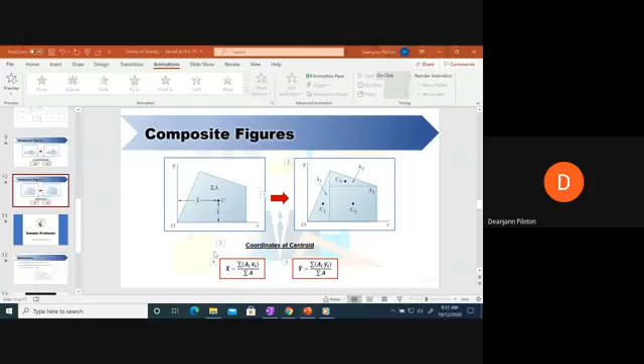Okay, amen. So the topic for today's class is center of gravity and centroid.

If you recall from equilibrium part 1, you can also check in the material under equilibrium part 1, I gave sample problems about these topics to clarify the difference between centroid and center of gravity. Now we will focus on these two concepts, center of gravity and centroid, especially when we deal with composite figures.

So this topic is part of our integral calculus. But what we will deal with here are composite figures that we can break down into regular shapes, for example triangle, rectangle. So we won't deal with irregular shapes here. Then we can apply the derived formulas to get the center of gravity or the centroid of the composite figure.

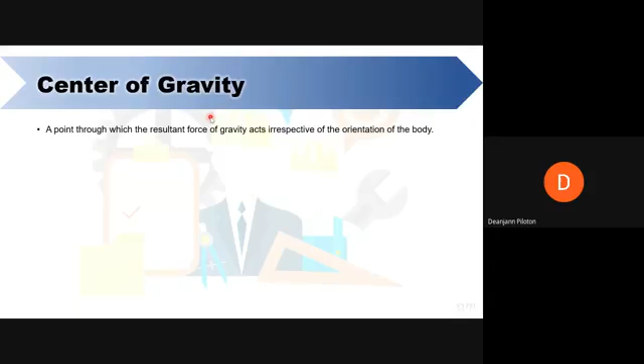Okay, so let's review the definition of center of gravity. It is a point where the resultant force of gravity acts regardless of the orientation of the body. Center of gravity is also defined as a point where the entire weight of the body is assumed to be concentrated. For example, a body is composed of several particles.

Each particle has its own weight. Then for a body, to determine its center of gravity, we need to get the resultant of the weight. So we add all the weights of the particles, then we denote it as, for example, capital W. This capital W will represent the entire weight of the body. And then to get the location, where the weight is acting, we can use Varignon's theorem.

Varignon's theorem, if you remember, we used in class to get the location of a force, especially in a single force system. For example, if you have the resultant of forces, and you want to find where its resultant force is located, you use Varignon's theorem. In Varignon's theorem, each term is force times the moment arm. So here, we will still use Varignon's theorem later on to get the formula for the coordinates of the center of gravity.

This center of gravity can be represented by coordinates x bar and y bar. So that is the definition of center of gravity: where its entire weight or resultant weight acts.

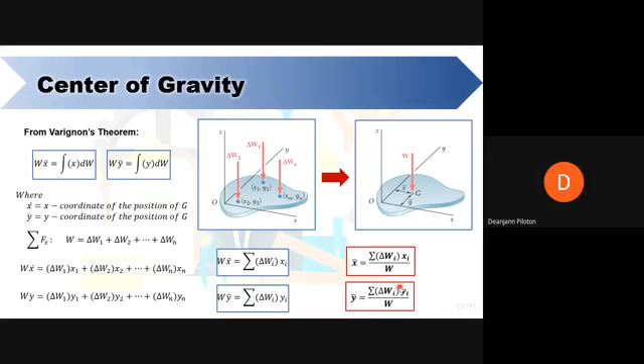Okay, so kung in terms of centroid, gamitan nato ang same figure as an example. Then i-let nato ang T as uniform thickness, so uniform lang iyang thickness all throughout, and then mass density represented by rho, and A as the entire area. So ang entire area sa body is denoted as A.

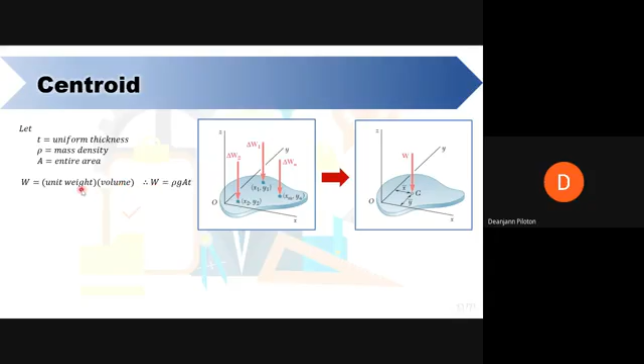So the total weight of the body is equal to the unit weight times volume. So that means that our weight, di ba, ang unit weight is equal to mass density times gravity, acceleration due to gravity. Then ang volume nato is entire area times uniform thickness. So kani atong representation for the total weight na in terms of its area, thickness, tapos mass density.

So pasabot lang ani class for the weight of each particle, pwede po nato sila i-represent in similar manner. Ang difference lang is na lain ng ilang area. For particle 1, A sub 1, particle 2, A sub 2, then for particle n is A sub n.

Okay, so using Varignon's theorem, kaniya ito makreate na equation na ginagamit nato to get the x bar. Buhato lang nato class, instead of dealing with weights, i-replace na to ang weight into this following form na naka in terms of mass density, area, and thickness. Okay, so kani siya. Mauna ni iyang form kung i-replace na to ang mga weight.

Then kung mapansin nato sa kanina equation, common ang density, so pwede na to makancel both sides. And also common po na acceleration due to gravity, so cancel lang po siya. And also ang thickness, so ma-reduce na tong equation nato into this form na area times the location sa particle.

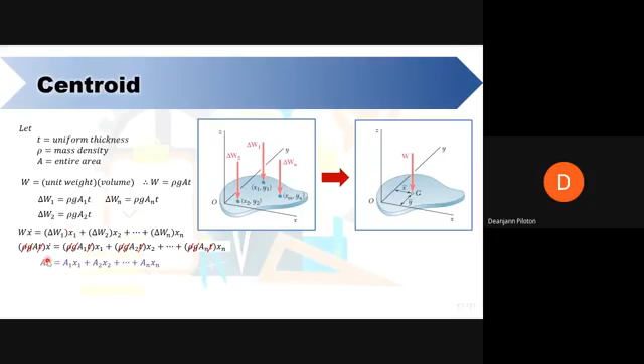So maka-create ta in summary og kanina equation.

So similar manner lang or way para sa pagkuha sa y-bar, i-replace lang nato ang mga weight in terms of kanina form na naka-mass density, area, and uniform thickness. So pwede nato makancel both sides ang mass density, acceleration due to gravity, and also ang thickness so that ma-reduce nato ang form in terms of area and location na y-coordinate. So maka-create ta o in summary na kanina equation.

And if you can recall sa mathematics, kanina equation is the first moment of area. So pwede na to makuha ang x bar of this point G na centroid or center of gravity using this equation. So this time class, nagadili lang ta og area. So summation of area times the location over the total area. Kani siya magamit nimo ni na approach if ang centroid and center of gravity kay nagka-coincide lang.

So naa tay mga formulas na gamiton for common shapes of areas and lines. So for example sa triangle, ang iyang centroid is represented by point C. So pwede po nimo ni gamiton ng mga formulas kung ang center of gravity nimo again nagko-coincide sa centroid.

So kaning point C is from the base represented by y bar. Ang formula daw is h over 3. Tapos area of course 1/2 base times height.

So kaning mga formulas man good class na naka-represent diri dili pasabot na y bar is pa mag-solve ka mao po niyang gamiton nimo na corresponding y bar because magmatter po ng orientation sa problem. Diri kung ingani ang orientation dito sa triangle, kani siya is kaning h over 3 mag-represent na siya as y bar. Pero for example, mag-drawing ta og lahi na orientation sa triangle.

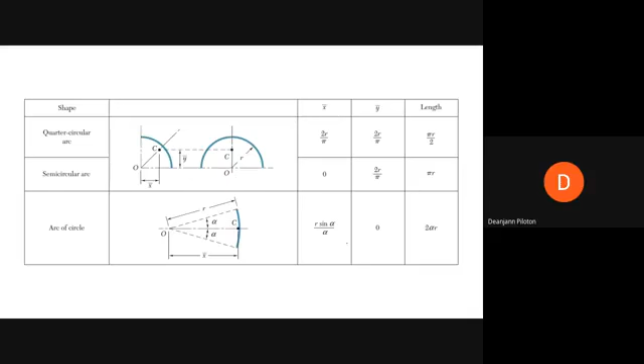Okay, so when it comes to composite figures, katong question ganina about x bar sa triangle. So ang pag-deal nato ato is composite figure. So let's start muna sa in terms of weight, sa center of gravity.

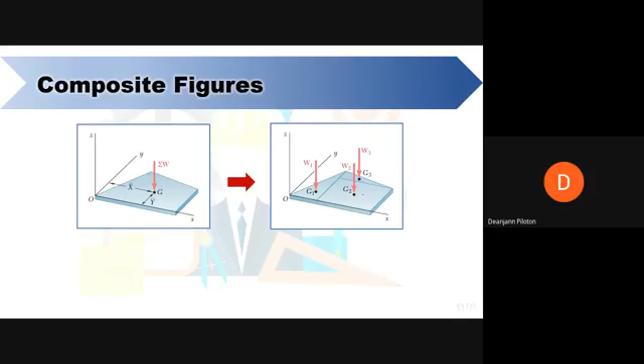Kani siya class, ang buhaton lang nimo, i-divide nimo ang imuhang given body into regular shapes. So mo ni ang itsura. So nakay right triangle, nakay rectangle, then another right triangle. Tapos kada shape is naa siya sarili-sarili niyang weight and center of gravity.

Tapos ang center of gravity karon sa kada shape is i-base na nimo dito sa formulas na na-present. So dito ka magbase para i-locate nimo ilang mga centroid.

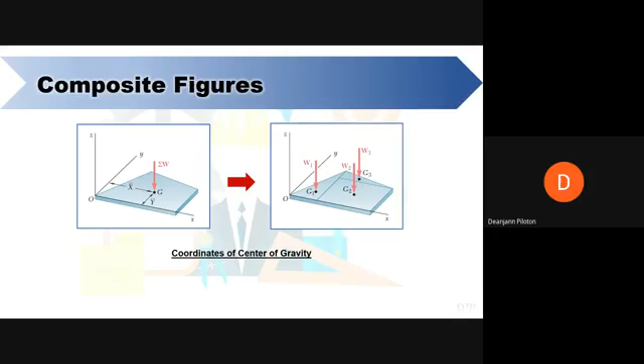So coordinates of center of gravity sa entire body, i-represent natong x coordinate by capital X bar. Kana po ang representation sa figure. Capital X bar is equal to summation of the weight of each shape na imuha or each figure.

Depende sa imong pagka-divide ni siya class. So weight of that figure times its own x coordinates sa iyang center of gravity or x bar niya. Then divided by the total weight of the entire figure.

So same lang po sa y bar, ang ginadil nimo is kada shape isa ka shape. Sa imong numerator, summation of the product sa weight sa isa ka shape times its corresponding y bar. Then over total weight, mo na imong pagkuha sa y bar of the entire figure.

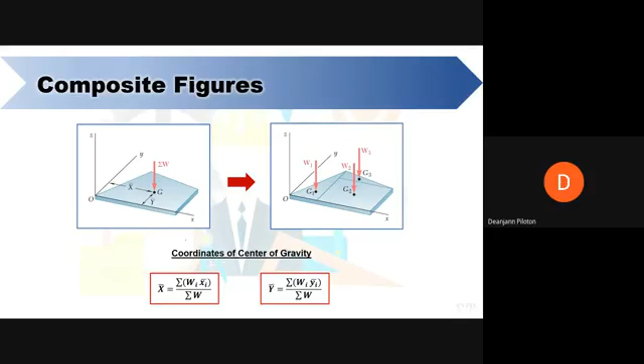The next is for the area. Kung in terms of area ka, same approach lang, i-divide nimo into regular shapes. Kanina ka area 1, area 2, and area 3.

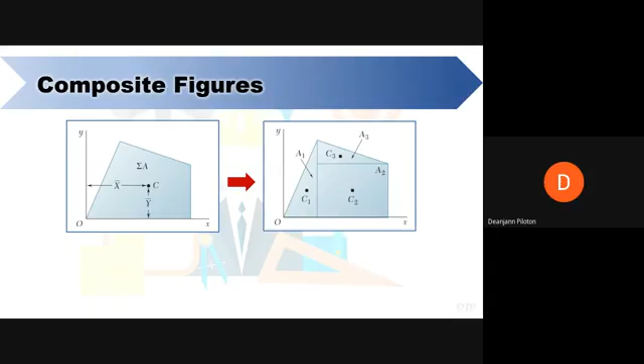So dito ganina sa to ang gibuhat sa triangle, nag-extend ta ato. Baga depende pud na siya sa imuhang diskarte nimo class to get the x bar. So pwede man siya may mubalik mangyapon siya sa original shape niya.

Okay, so kani siya is no need na mag-extend pa ta. Pwede lang na i-divide na nato diretso ang shape. I-divide na nimo mga shape into regular shapes. And then, isolve nimo ang sarili nila na area, kada area sa isa, and also the centroid sa kada isa ka figure.

So, ang coordinates sa imong centroid for the entire figure is capital X bar gapon, but this time, ang ginadil nato is area na. So, sa numerator is summation sa product sa area sa isa ka shape times its X bar. Then, divided by the total area.

Excuse me. So, same lang sa Y bar, naka in terms of area lang.

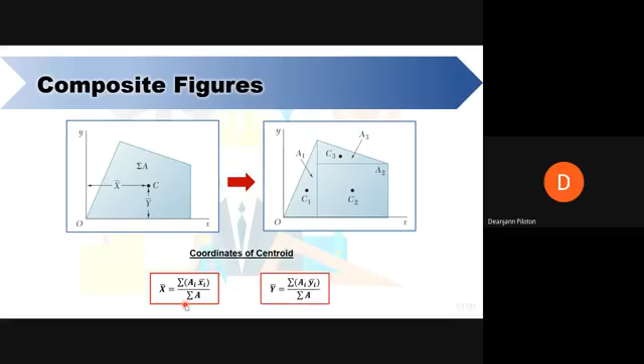Sige, so mag-solve tag sample problems to show the applications of formulas.

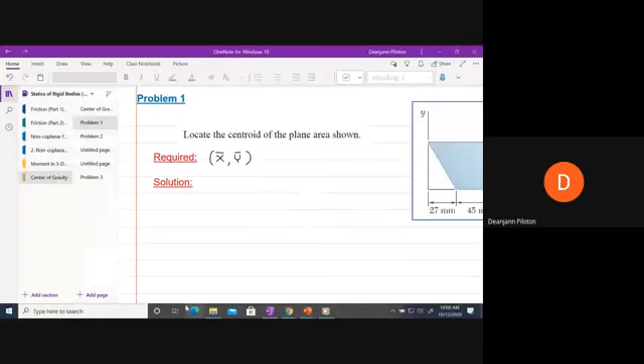So problem 1, locate the centroid of the plane area shown. Isa diri class na problem, ang buhaton nato is pwede nato i-divide into two figures. So pwede ta mag-create og right triangle. Ano siya?

So ang right triangle nato na figure is i-denote nato as figure 1 or shape 1. Tapos kani ato ang square sa pikas is denote nato as figure 2 or shape 2. Then kada isa ani is naa siya sariling centroid.

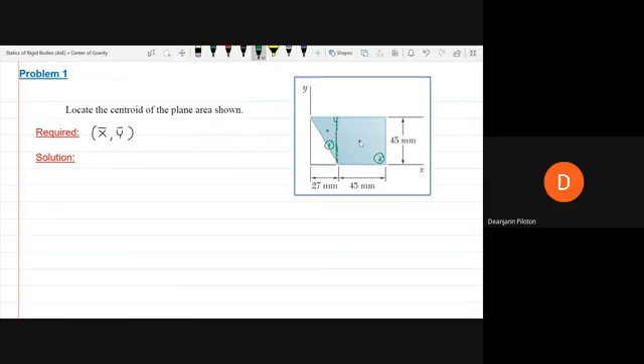So sa kanina problem class nag-locate ta og centroid since naa mga instances na mo coincide lang siya. So ang i-deal nato karon kung centroid is area na lang and ang corresponding na mga centroid coordinates sa kada isa ka shape. So i-take note nato na mao ni ang corresponding formula to get the centroid.

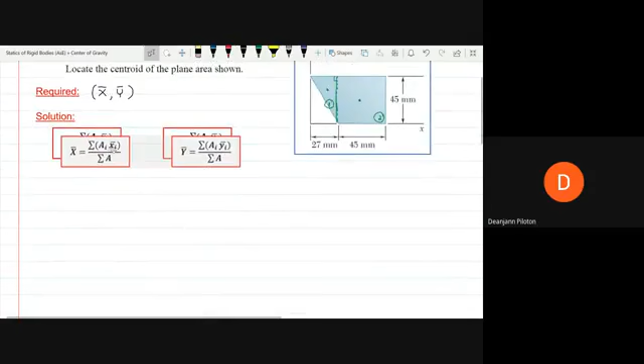So himay-himayon nato class, pwede ta mag-start sa first figure, kaning right triangle.

So, according sa itong pagka-denote class, kaning figure 1 na to, mao na siyang right triangle. So, wala ta nag-deal o anang extension na mag-minus patag area. So, add lang ta ani.

So, kaning area 1 na to is equal siya sa 1/2, 27 mm times 45 mm, 1/2 base times height. So, isulat lang nato as 1/2 times 27 times 45. So, this is equal to, kani siya ay positive 607.5 mm raised to 2. So, sulat na akong positive.

Pwede ninyo ni i-omit class, just to emphasize lang na kani siya na area is magdungag ni siya og area para mabuo ang composite figure. So, dili siya negative yang sign.

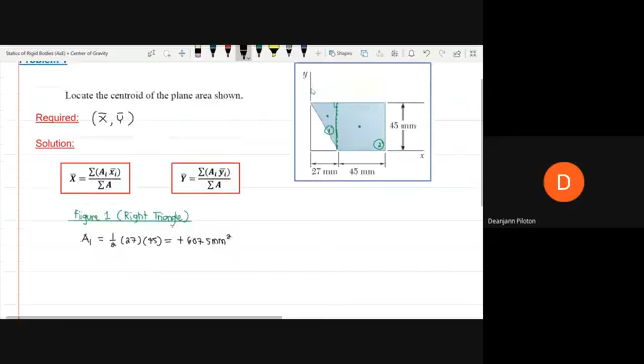Okay? Kung ano siya pa minus, for example, nag-apply ta og kanina shape, ang ato strategy, for example, the entire rectangle na naay kaning side the 45 mm, then ang isa niya ka side is 27 plus 45. So, pwede man natin isolve siya as bigger rectangle minus kaning right triangle. Wala siya na right triangle. Kani bitaw wala, pwede nga na pagtanaw na to sa shape para magkuha tag center later on.

So, ang area aning right triangle is pa-minus. Pero ang pag-deal nato is pa-positive naman. Padungag naman siya og area para mabuo ang composite figure. So, expect na to, syempre, ang figure 2 na to, dapat ang area 2, ang sign niya is positive.

So after area 1, let's solve for x bar 1, small letter. There's x bar 1 for figure 1 and y bar 1.

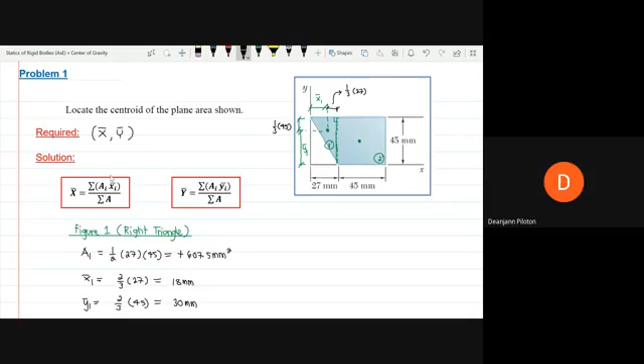Okay so for figure 1, what we need based on the formula is the area of each figure, then x bar of each figure and y bar of each figure, and later the total area. So that's done for figure 1, let's proceed to the next figure.

Okay so the next figure is this square. So its area is 45 times 45. This is equal to, the area is added, right? To complete the composite figure. So this is equal to positive 2025 mm raised to 2. Again, we can omit the positive sign since its sign is positive.

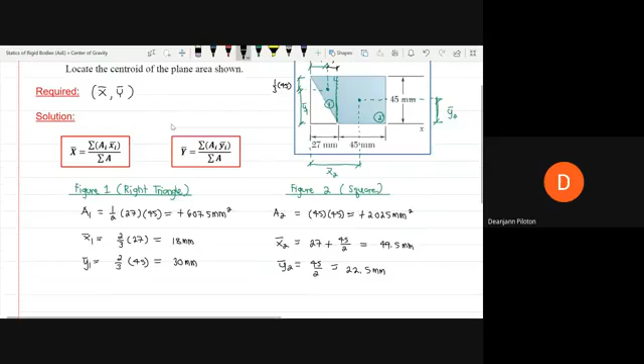So the next thing we do, according to the formula, we need to compute the total area. Okay so total area is equal to area 1 plus area 2. So this is equal to 607.5 positive, plus another positive 2025 area. So this is equal to 2632.5 mm raised to 2.

Okay so let's follow the formula, because our x bar is equal to - in the numerator we can break it down as area 1 times x bar 1 plus area 2 times x bar 2, right? Because it's the summation of the product of area and location of centroid over summation of area.

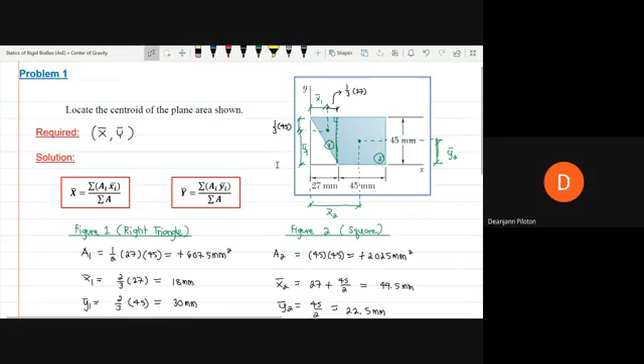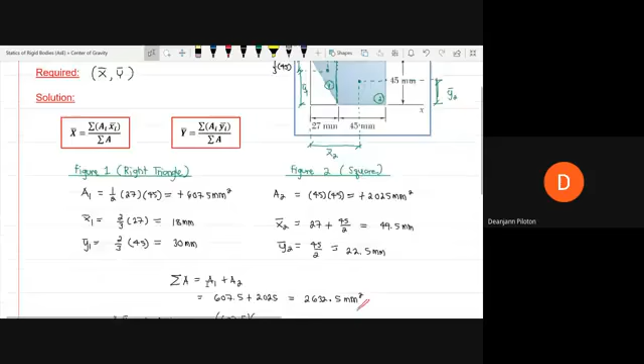Our area 1 is 607.5 positive. And then our x bar 1, according to the coordinate system class, is positive since it's located on the right side of the y-axis. So your coordinate system matters. If the centroid of a shape were located on the left side of the y-axis, it would have a negative x coordinate and positive y coordinate. So the sign of the coordinate matters in your solution. So what you do is carry the signs into the formula when solving. So here it's just the first quadrant for our figure, that's why our x bar and y bar are positive. And also our area is positive.

Okay so our x bar 1 is 18. Then plus area sub 2, 2025, x bar 2 is 49.5.

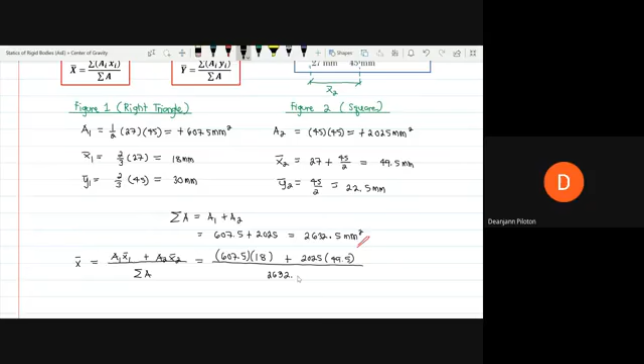Then total area is 2632.5. So ang x bar nato is equal to 42.23 mm.

Questions so far, class? Wala ba? Sir. Okay, sige.

So kana x bar, sunod y bar. So ang y bar nato, pwede nato isulat as area 1 times y bar 1 plus area 2 times y bar 2 over summation of area. So this is equal to 607.5.

So ang y bar 1 nato is positive 30. Plus 2025 times y bar 2 nato, positive 22.5. Then over summation of area, that is 2632.5. So atong y bar is equal to 24.23 mm.

So, ang final answer nato is centroid is located at 42.23 mm and 24.23 mm. So, mao niya itong coordinates. And this is our final answer.

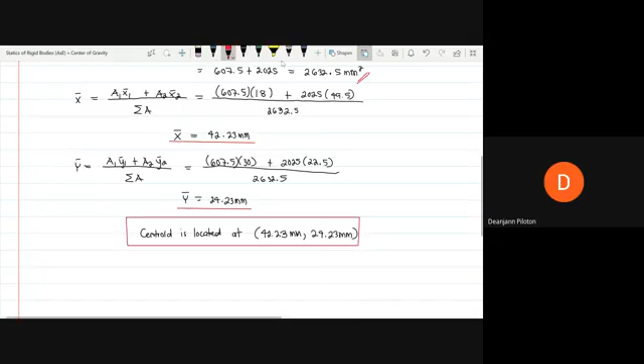So, walay clarification sa number 1. Sige. Wala ata, no? Okay, proceed ta sa problem 2.

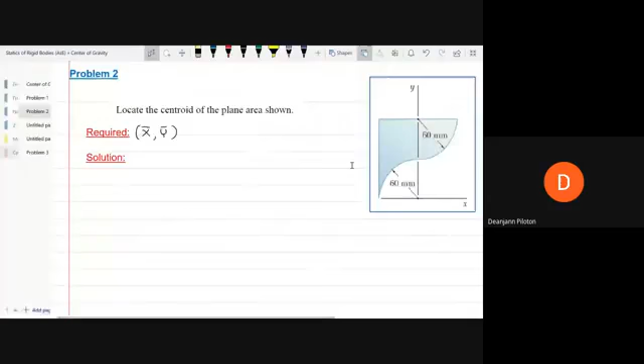Okay, same lang na requirement, locate the centroid of the plane area. Then, kanina po ng figure. And this time na ay pa-minus na figure. So, ang buhatan nato ani is himay-himayan nato ang mga figures.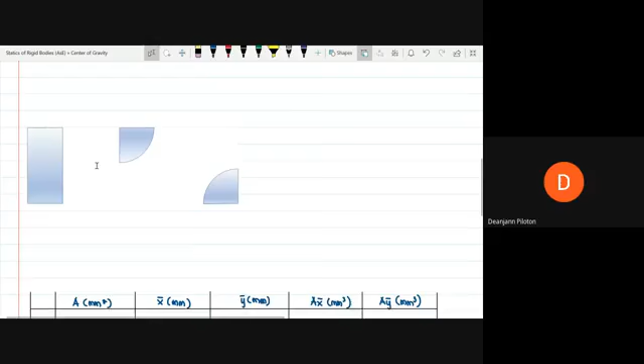So, gamitin nato ni siya. Kanina figure is, kung mapansin niyo class, na pwede mo siya i-break down into a rectangle plus a quarter circle. Then sa baba niya is minus quarter circle. So this means na kaning composite shape is equivalent lang sa rectangle plus quarter circle minus a quarter circle sa ubos. Then equal sa composite na figure.

And then ang kaniya, ang rectangle is pwede na to i-denote as shape 1 or figure 1. Tapos kani is figure 2. Then kani is figure 3.

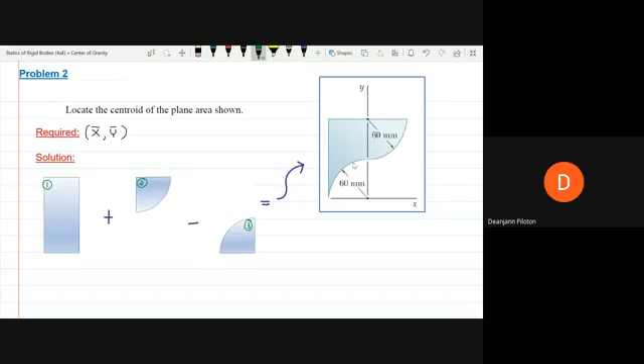Okay, so pwede natin i-solve ni siya class na pareha sa problem 1, na kumbaga isulat na nato diretso ang mga solution. Pwede po natin i-tabulate. So kung daghan na kayo mga shape, pwede kung asa mas convenient para sa imuha, pwede ni may tabulate or pwede largo solution lang na pagka-present sa problem 1. So this time, i-try na to ang isa ka solution na i-tabulate na to mga values.

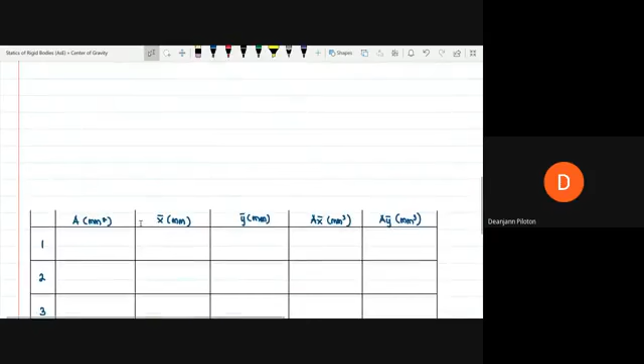So, gamit ta og kanina table. So kung ma-recall niyo ang formula, di ba class, kailangan natong area, x bar and y bar sa kada figure. Tapos later on is kailangan nato ang mga product sa area and x bar sa kada shape. Tapos i-sum up man to siya. Then i-divide by the total area.

Okay, so diri sa tong table, kung masigo lang sa inyong table class kung mag-solve mo, pwede diri po ang solution sa sulod sa table or pwede po i-separate ninyo. Then ang ibutang na lang niyo sa table is kumbaga summary na, especially pag daghan shape, para mas dali ninyo siya matrace ang mga values. Okay, so

mao ni siya ang kaning 1, 2, 3 sa left side, mao ni ang representation sa figure. So figure 1, figure 2, figure 3. So start ta sa area.

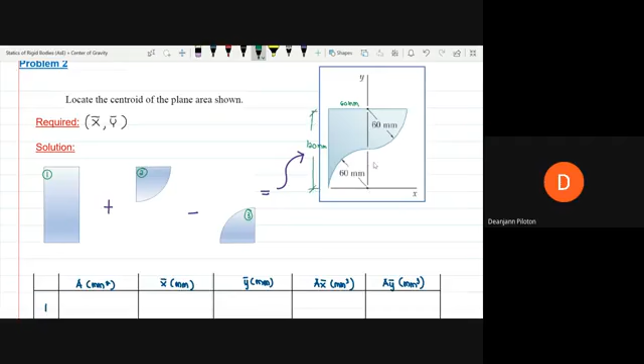Sa figure 1, ang area diya class is according sa given, di ba? 60, this is 60 mm, because ang radius sa kaning arc, quarter circle, is 60 mm. Then kanina length is equal siya sa 120 mm, because that is 60 plus 60, duha ka radius. So ang area nato sa atong figure 1 is positive 60 times 120, so equal ni siya sa positive 7,200.

Maklaro pang sulat class sa table. Hello? Yes. Okay.

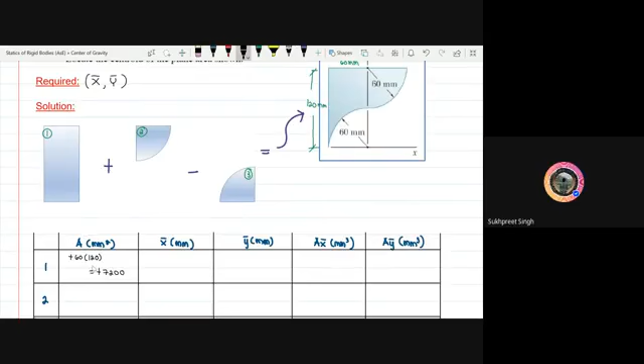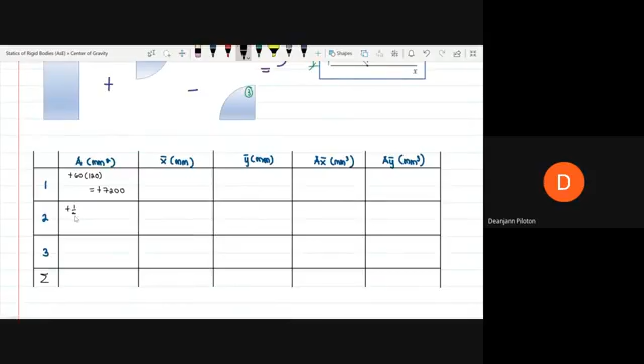Sige, so next is figure 2. Natay quarter circle. Then, kanina area is positive, padungag siya sa composite figure. So, kung quarter circle, pwede siya 1/4 of the area of the circle. So, positive 1/4 of pi r squared. Pi times, ang radius nato is 60, then raised to 2. So this is equal to positive 900 pi.

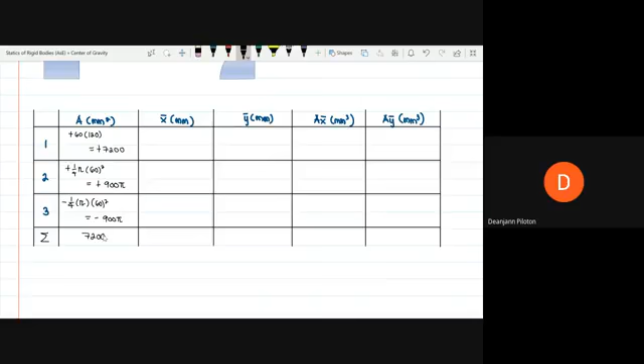Then lastly, nata area na quarter circle po. So 1/4 yapon sa area sa circle. Then ang sign nato class is negative since pa-minus man siya. So equal lang siya sa negative 900 pi. Okay, so kung i-total nato ang area, this is equal to 7,200 since mag-cancel out ang maning 900 pi.

Then next, proceed ta sa x-bar sa kada shape. So start ta sa shape 1. Siyempre, ang centroid class is diri, ano yung x-bar 1. Then kani is murag naog di dapat.

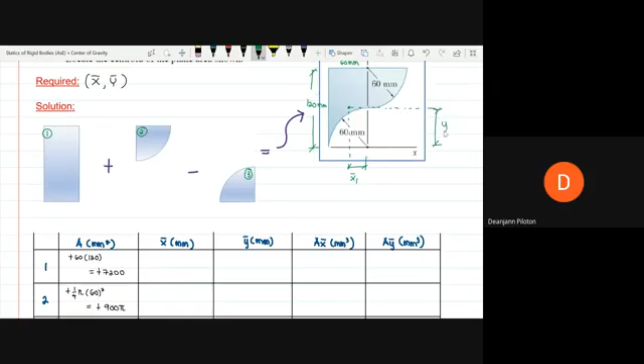So kana atong y-bar 2. Based sa gihatag na axis, nagitagaan man ta, so dili na ta mag-set. Kani x-bar 1 nato dapat negative ang iyang sign, kaya nasa second quadrant man. So negative 60 over 2, this is equal to negative 30. Then sa y-bar, divide 2 lang yapon, pero this time positive. So positive 120 over 2, this is equal to positive 60.

Okay, next sa shape 2 or figure 2, kini siya na quarter circle. Naadiri adapit iyang centroid. Kung mag-focus sa gi-separate nato na figure, kana na centroid, gikan sa isa ka straight edge niya, ang location is 4r over 3 pi. And also from the other straight edge, 4r over 3 pi gapon. Same lang diri sa isa ka quarter circle, same lang nilang radius, so mag-equal lang. And sa sign sila mag-vary. So this means na x bar aning shape 2 nato according sa coordinate system nato, positive ni siya, positive 4r over 3 pi.

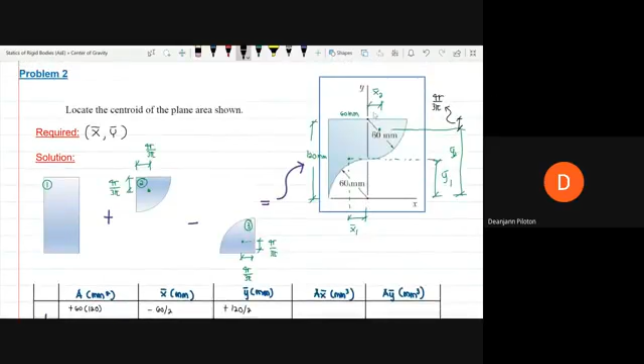Then next, ang iyang y-bar. Kung tanawan na to class, kanina distance sa taas, kana siya is 4r over 3 pi, di ba? So ang y-bar 2 nato is equal to 120 minus 4r over 3 pi. Ang sign nato is positive, naa man siya sa taas, diri sa y-axis, no? So positive atong sign, positive 120 minus 4r over 3 pi. So this is equal to positive 94.54.

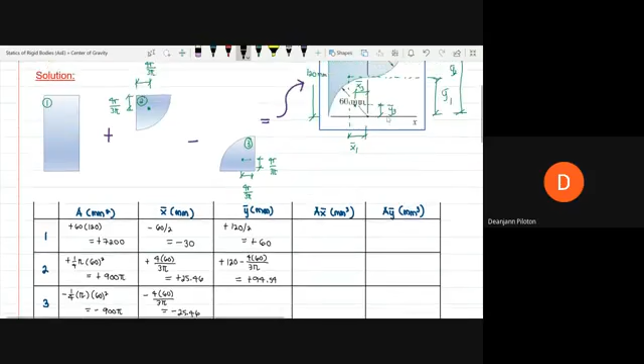Then lastly is figure 3. So let's say naadapit diri ang centroid. Okay, so kaniya atong x bar 3, then kaniya atong y bar 3. So x bar 3 nato based sa coordinate system, negative siya. So negative 4(60) over 3 pi, so negative 25.46. And then ang iyahang y bar is positive lang, so positive 4 times 60 over 3 pi.

So no need to sum up the x bar and y bar. Ang kailangan nato i-sum up after the area is kaning area times x bar and area times y bar. So ang next buhatan ani class is ang area i-multiply nimo by its corresponding x bar and also corresponding y bar. So sa figure 1, its area multiplied by the x bar, take note na negative na sign, pasabot lang ani negative ang atong x bar. So negative 216000. The next area na 7,200 multiplied by positive 60, so we have 432000.

Sige class, kamo daw 900 pi times 25.46. Okay, anyone? 71986.45, sir. Naka-form na naka-pi. Yes, sir. 22914 pi. Okay, 22914 pi, positive, no? Ang sign, di ba? The next, 900 pi times 94.54. 85086 pi, sir.

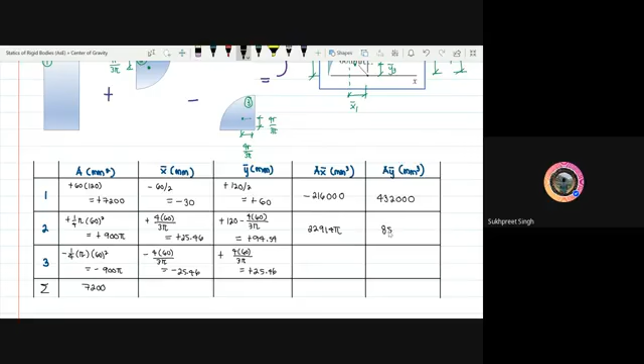Okay, the next is figure 3. So negative 900 pi times negative 25.46, dapat positive siya, no? Kaning 22914, same lang siya aning isa. The next is negative 900 pi times positive 25.46, so this is negative 22914 pi. Sige, paki-sum up class sa area x bar and sa area y bar, kaning duha ka column.

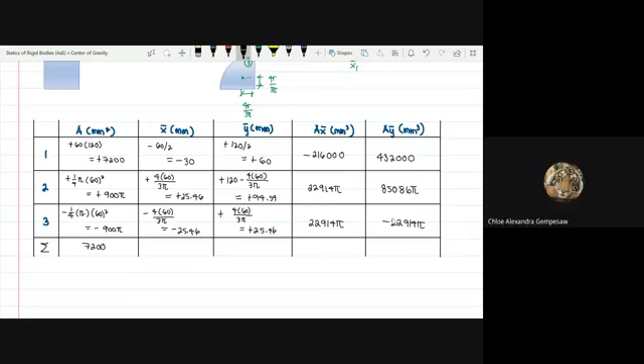Ang uban, gising pang uban. Yes, sir. Okay, sige. Negative 72027.09, sir. Okay, so negative 72027.09. Then sa area y bar, 627319. Then ang decimal is 0.10. Tama ba? Okay, yes sir, 0.10.

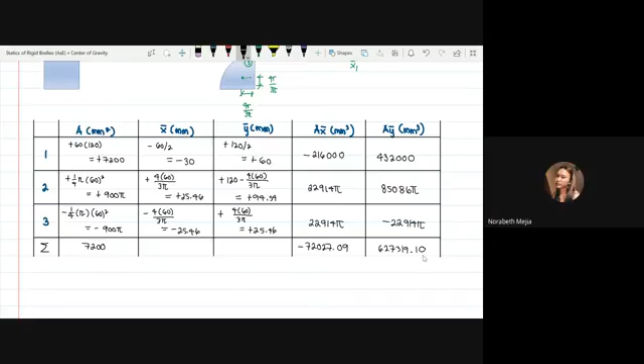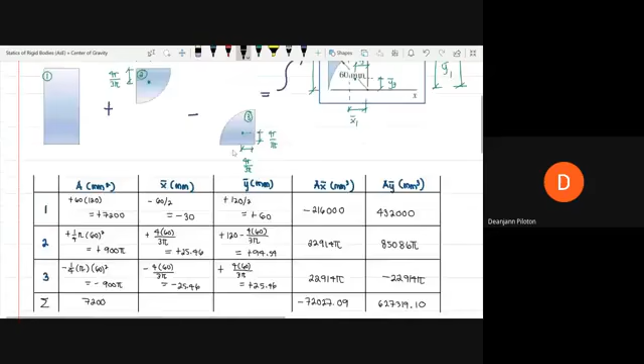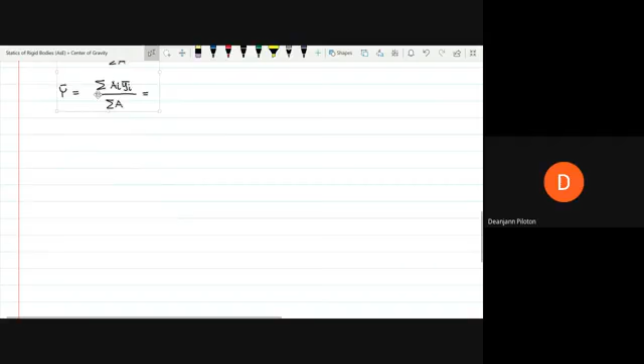Apo, sir. Okay, so mao ni siya class ang nakatabulate na form. So pwede nga ni inyo ang solution, samot na kung daghan og shapes, pwede lang nga ni. Okay, take note lang class sa ang area, dapat mag-matter ang mga signs ani, kung negative ba ang area, pa-minus ba siya. Then sa x bar and y bar, itanawon yun ninyo ang location, especially kung tagaan mo og axis para mabutang po ninyo ang tama na sign. Okay, so according sa formula, mao man ni atong formula for x bar and y bar. So diretso lang nato plug in sa kaning formula ang mga result.

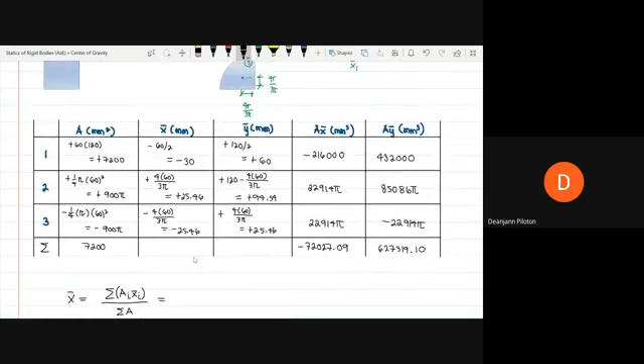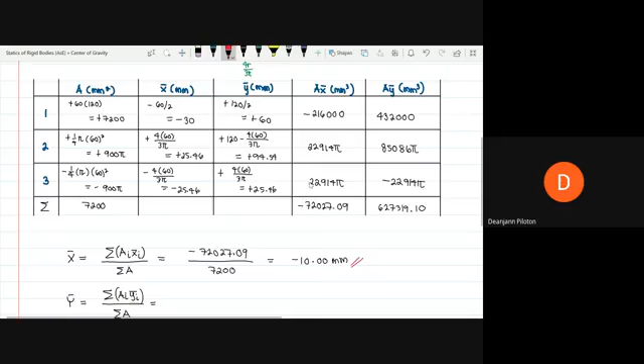Okay, so summation of area times x bar, mao ni siya katong sa tuang kaning negative 72027.09, then divided by 7,200. Okay, so ang answer ani is negative 10.00 mm. Kani ato ang x bar sa composite figure. Then sa y bar is equal siya sa positive 627,319.10, then divided by 7,200. So this is equal to positive 87.13 mm.

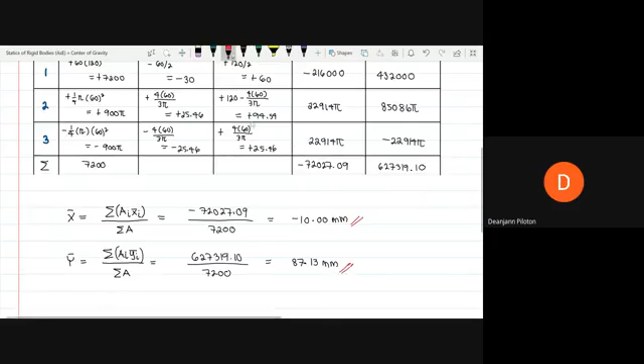So, ang final answer nato is centroid. Centroid is located at negative 10.00 mm, 87.13 mm.

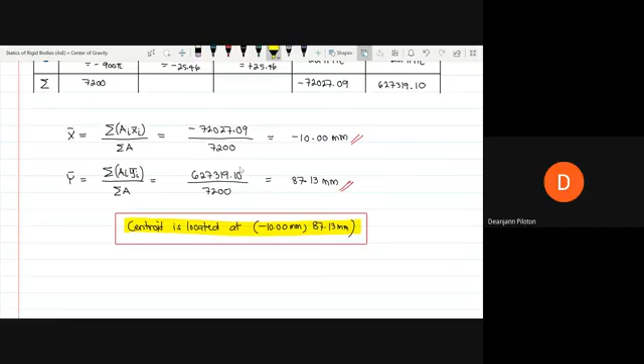Okay, question class sa kanina problem. Wala question? Problem 2. Okay, sige. So,